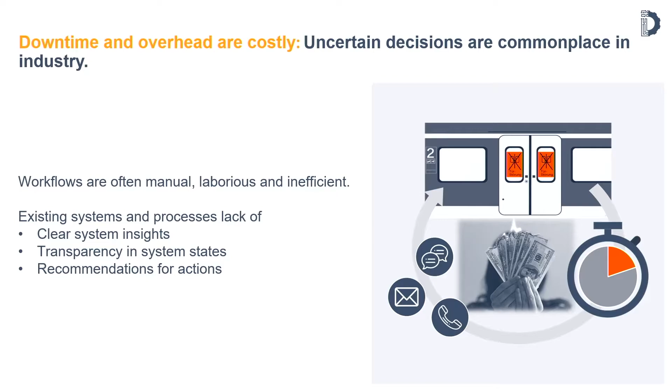So there's a lack of clear system insights, a lack of automated interpretation of the data you already gained, and a lack of recommendations assisting in your everyday decision-making process. And this is what we do.

I brought with me our solution 8Now, which helps you in predictive maintenance, for example. With 8Now, we automate the interpretation of complex machine and process data. What we're doing is quite every time the same: we do performance analytics, we monitor KPIs, we monitor thresholds - that is very common, right?

We do condition monitoring with it to diagnose anomalies, the root cause of anomalies, and to say the anomaly is coming from a distinct failure of the system, and the failure is XYZ. That's what our solution 8Now does.

And on top of this, we can make predictions of how long a part will last in a certain use case or in operation. So: monitoring KPIs, anomaly detection, diagnosing failures and states, and predicting future states. This is what we do with 8Now in every project and every solution we develop for our customers. So keep that in mind.

We are a very small team, we have 6 employees, I'm one of the founders and managing director. Our background is in engineering, and we've been developing and delivering decision support systems for our customers for 4 years. We founded out of university - we did our PhD at TU Darmstadt, and then founded the company.

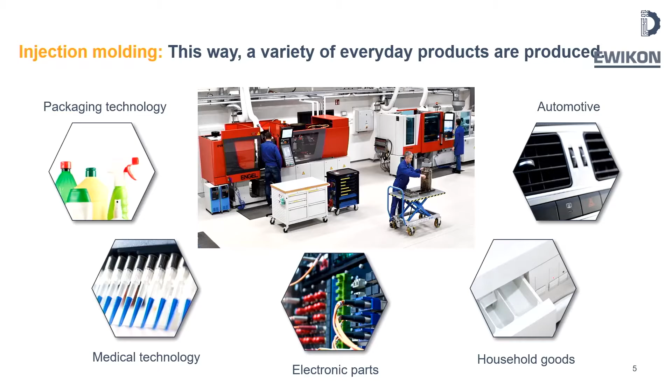So this is one of the machines in the middle, and the two most interesting parts are the mold itself. It gives the geometry of the product, of the plastic product in mass production, and you need a system to bring the melt into the mold. Our customer, EWIKON, produces hot runner systems that bring the melt into the mold for such machines. You can see the different products you can produce with it.

Here you can see with one shot of the machine, you are able to produce 100 of parts in just a second. You see it here in the video.

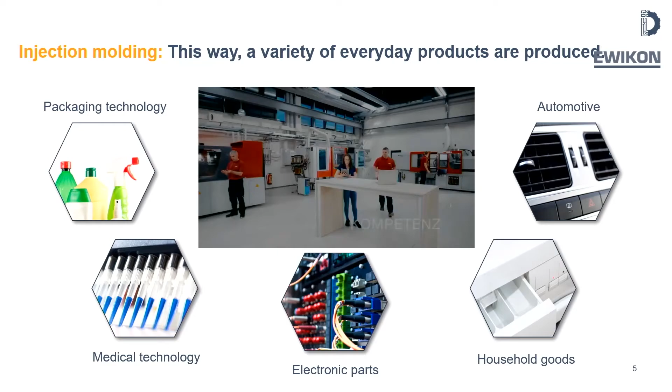And now I can talk about the hot runner system itself. You see here a wide range of hot runner systems from small to big, and with that you are able to transport the hot melt into the mold.

EWIKON is an equipment manufacturer for injection molding machines. If you want to manufacture plastic products, you need an injection machine, a hot runner system, and the mold. Every product you want to produce has its own hot runner system and its own mold, so we're talking about batch size production of one.

EWIKON is located in Hessen, right as we do. We are based in Darmstadt, in the south of Frankfurt, and EWIKON is between Frankfurt and Kassel in Hessen. It's a typical example of a German Mittelstand company.

With over 40 years of experience in hot runner system building and manufacturing, they produce hot runner systems with high quality for high quantity products. They want to reduce the sprue waste, so hot melt doesn't go outside the mold, so that you can produce very efficiently.

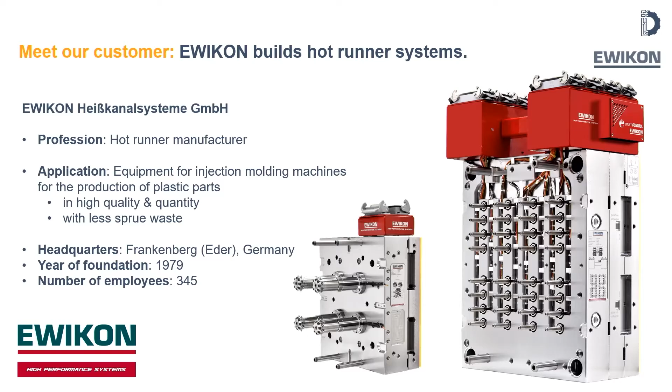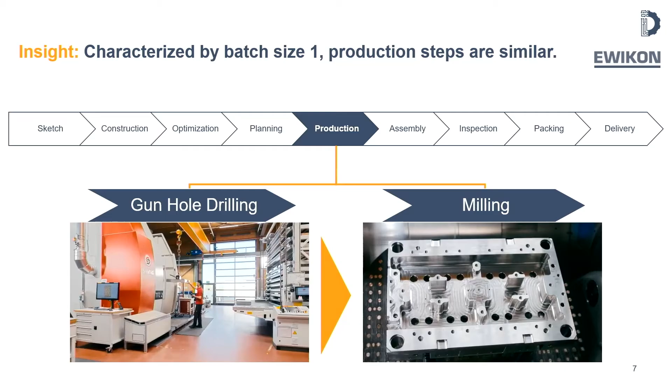So I talked about batch size of one, but the products are very similar, especially the production steps. It starts on the left with an aluminum plate, which is gun-hole drilled. Gun-hole because over the whole length and width, the plate is drilled, so it has to be high precision drilling, and afterwards it will be milled.

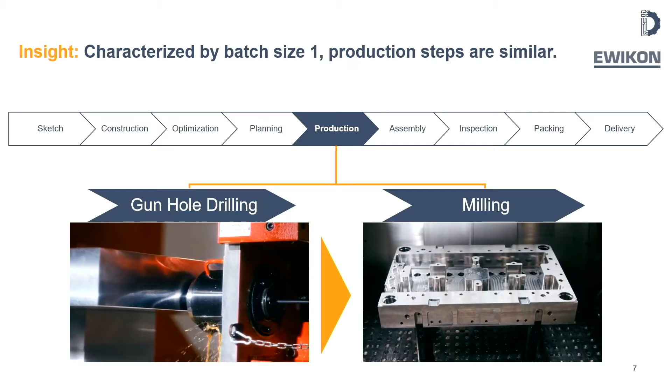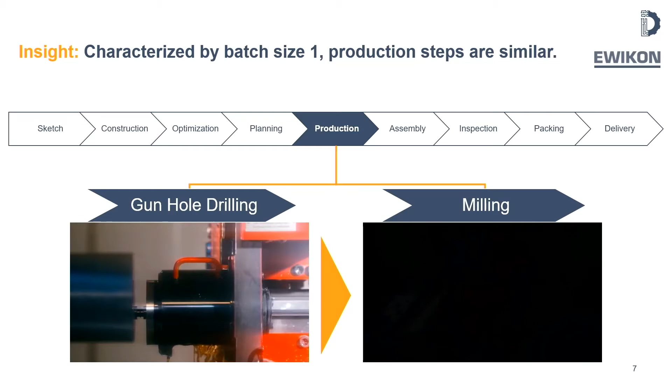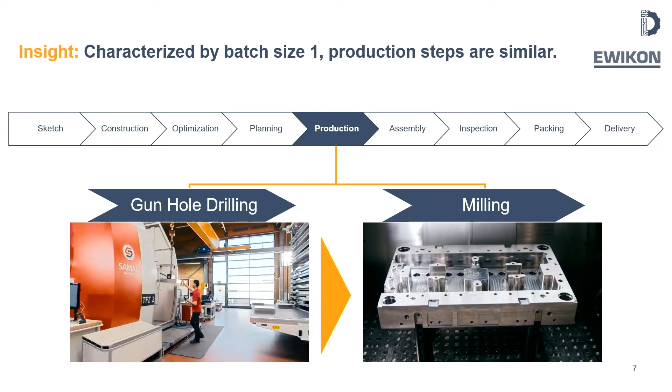With those two process steps, it's all about the machines being NC machines, so you get automated process times out of the machine you can work with. They drill and mill the tunnels for the melt and also cooling holes into the plate to produce such a system as you saw on the slide before.

Here you see also such a system with the cooling holes and the melting holes. Maybe there are pins on it, and here you can see you can produce in one shot over 90 products at a time in such an injection molding machine.

The challenge for our customer was to estimate the lead time, so the manufacturing time from getting the plate, drilling, milling, setting up and handling the part, setting up the machines, till delivery to the customer. So the lead time consists of different shares.

There are shares from the NC machines, from automation - I get a clear time in seconds for how long it will last to do gun-hole drilling and milling. But I do not have timestamps for handling or for setup times.

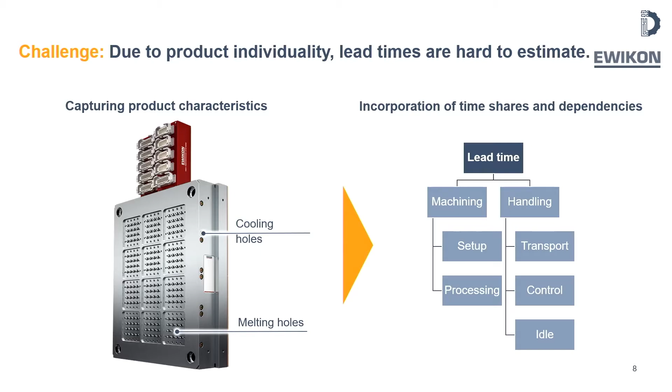If a product is very complex or arises with high complexity, you have to rearrange the plate in the machine, and I do not see this in the data they already gained. So there are different shares over the whole value chain of the manufacturing processes.

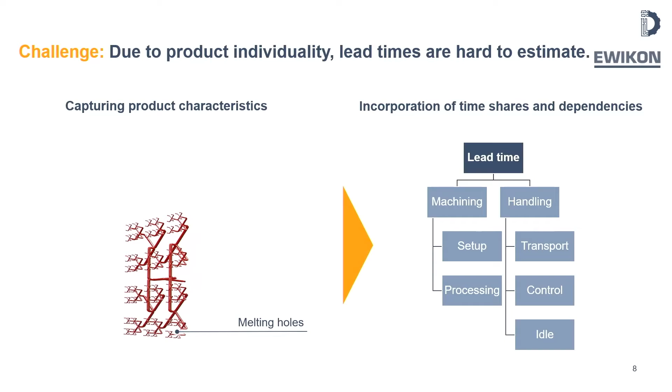Here you can see more detail into the part with the cooling holes and the melting holes, and this is done by those two production steps.

So the status quo is currently that lead times are estimated by hand by humans in sales and with system experts using CAD models and drawings. They open up documents and have to fetch the complexity of the product for the customer to estimate how long it will last to produce the part.

Not on the machines, not the NC time - the whole lead time from when the plate was delivered to when I took it to the machines and I can pack it for my customer and send it out.

So it has a high company relevance to estimate those lead times because you want to plan your production and estimate how much effort you have to put into this product. It has something to do with sales because when my lead time is way over my estimation, I lose money. And it has high customer relevance because you want to give the customer a specific delivery date where he can expect the part he ordered.

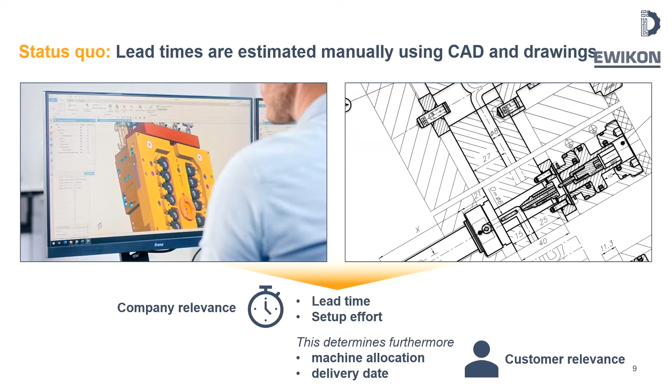So we built up a system, a model, an AI-based model with relevant characteristics out of the data our customer had. You can see our hybrid modeling - on the bottom you see data from systems like ERP systems, the CAD, the CAM where you get the NC machine times, more information about the customer itself, and the products from drawings and the CAD models, the computer-aided design models where the product was designed for the customer.

And the customer said, check mark, this is the product I want - the hot runner system, please produce it. Then we talked a lot with the domain experts of our customer.

That's the middle layer, the expert knowledge, because the machine operators know their products and machines best, and the characteristics to handle and set up machines and processes for every product. On top of this, we can talk about models in mathematics or using AI for regression and classification.

Keep in mind, we try to only work with the bottom layer, the data part from our customer, stacking this up with AI, but we could only explain about 40% at max of the whole variance of the lead times. So only with data and AI, it won't work. We have to cover over 60 to 70% of the variance in explainability by bringing in the models, expert knowledge, and regression and classification models.

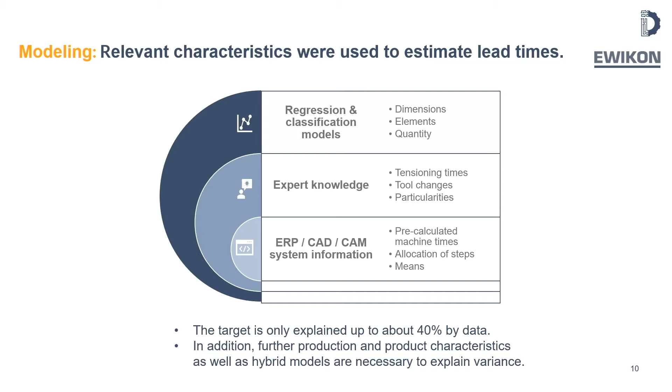So we developed a solution, you see here on the right, and our customer is now able to use the application. In the sales process with the end customer of the hot runner system, we use the data out of this, and we had to change a little bit the process steps in the value chain. So we work also with the CAD and CAM models, but to do this, our customer has to set up his IT a little bit differently to the state before our system worked.

We changed a bit the workflow, how the expert works in the sales process and creating those information. But now our customer is able to estimate fully automatically the different shares of the lead time for a whole bunch of their products. So there are various types of the product. Everyone looks very similar, but is very, very different in how to manufacture a product.

The application now contains transparency also for the sales and domain experts at our customer, because we are able to, in the bottom right of the application, say the part you've given me, or the order, takes about 35 minutes to manufacture, and you have a setup time for the machines of about 12 minutes. So the lead time has to be, in addition, 47 minutes.

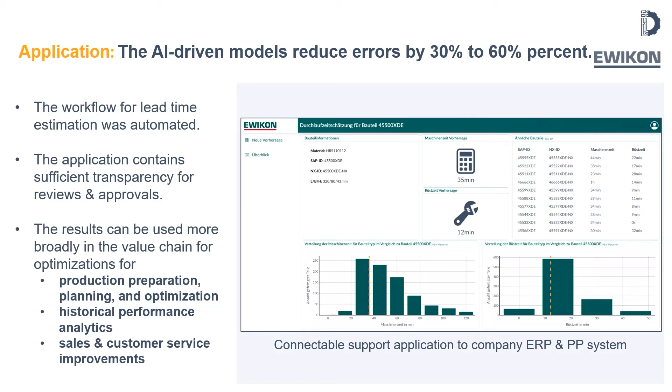So what we learned are three things, or three pillars. You have to create a great database to do such a PoC or an MVP, or deliver a decision support system. Our work itself was only 2 to 3 months, but over a period of time of about over 2 years.

Why is that? We spent only 2 months building the application and running it now at our customer. But our customer has to set up processes new, how the data generation is, for example. We started with a process analysis and recognized in construction, every person constructs a little bit differently, and some standard features in the CAD system are not used by everyone.

So we have uncertainties in the data, and we couldn't work with the data because we couldn't clean it, and because the data generation was wrong. Such characteristics we had to clean up to build the system. And also I talked about the process steps in sales and creating the CAD models we had to tackle.

I think it was a huge benefit for collaboration of the employees at our customer. They do cooperation, but with our project it was a really, really big digitization project. They learn a lot more about the work from colleagues, how they work, how they work with the data gained from me, gained from them. So it was a huge success, and we all were in the same boat and took the digitization program over 2 years together with great success for this solution.